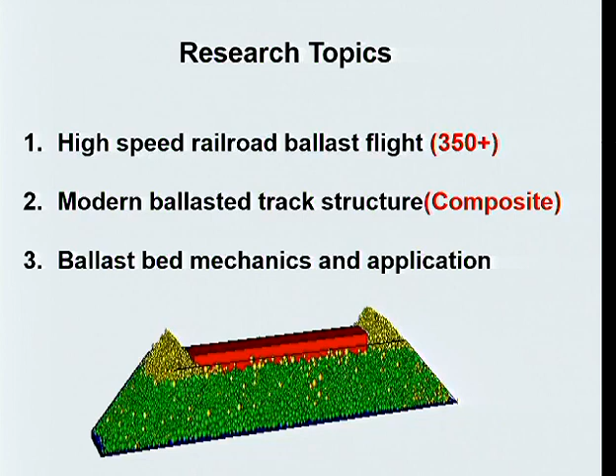Next, I'll show you a global perspective of China's high-speed railroad network. Up to now, we've covered 20,000 kilometers of high-speed railroad, about 12,000 miles, and we cover 2/3 of the world's high-speed railroad. More than 10 years ago, we had nothing. In just a few decades, we went from nothing to the number one position, far beyond the second position.

Not only the total mileage, but also coverage in places like the west, desert land, northwest, northeast, cold zones. And here we have high-speed rail running on this island. We even have the ambition and dream to connect with Taiwan. If political circumstances allow, we can construct an underground tunnel, no problem.

Another thing to share with you: for example, from Jinan to Qingdao, just within Shandong province, we have 3 railway lines: a freight one, a high-speed one at 250 km per hour, and now we are constructing the third one at 350 km per hour, just to connect the 2 cities within 1 province.

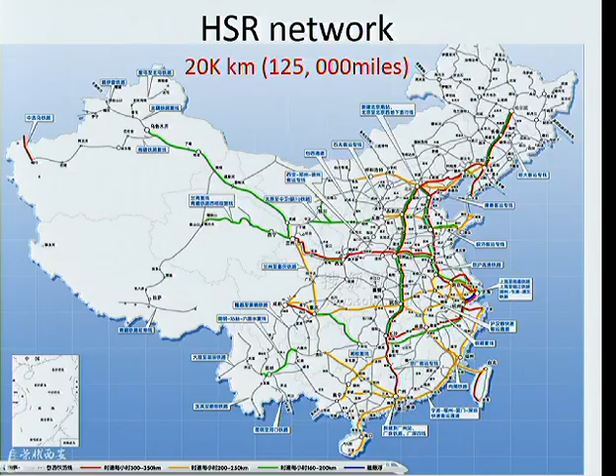90% of China's high-speed railroad uses slab track. It is a pity for me, not only because of the money, we invest too much money, but it also consumes too much cement, steel, and causes pollution. Too much. Somebody will maybe ask, why use slab track, why use ballast track? This is not the subject of today.

But I want to say that for each country, each product, the LCC, life cycle cost analysis, is different. And even for the same country, same product, 10 years ago, for example, from Beijing to Tianjin, the first high-speed railroad in China, we used this slab track. 10 years ago, each unit block, 6 meters long, cost about $4,000. But now, each block costs just $1,000. Because we have large scale, we can cut down the unit price. But some countries could not benefit from this technology or the market.

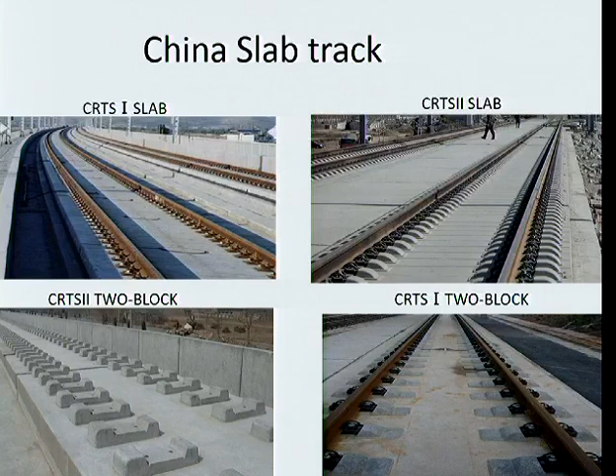When I share my lessons with my local students, I use the analogy method. I compare the slab track to men: strong, rigid, sometimes stubborn or stupid. And the ballast track is like a female: flexible, gentle, smart. Yes, this is it. And each coin has 2 sides. The ballast track's advantage is the disadvantage of slab track. Remember that, it is enough. Next one.

Just as David Lange said in the last seminar, micro cracks are the nature of concrete, born with it. We could not change it. And with time of service, ballastless slab track has problems: water, temperature, settlement. It's a pity that 10 years ago we didn't take this problem seriously. For example, crack control. We just designed and controlled the quality of strength, but somewhat omitted the cracks.

Huge problem. I could not present too many photos like this, but we have lots of such situations and conditions. It's very difficult to repair. We need a curing time within the window time of 3 hours. Impossible. And even when we use a chemical reaction method, like polyurethane, there is still a problem. Detection methods, evaluation, post-evaluation. Some small companies are working on it. We hope for help.

I also use the analogy with my local students that slab track is like the traditional Russian female. For the first 20 years, pretty excellent. After another 20 years of service time, just so-so. But for the final stage, the last 20 years, you don't want to see her at all. So this is what I share with my local students, because when you visit on site, it's excellent. But with time and aging, the aging is not like this, but like this, okay?

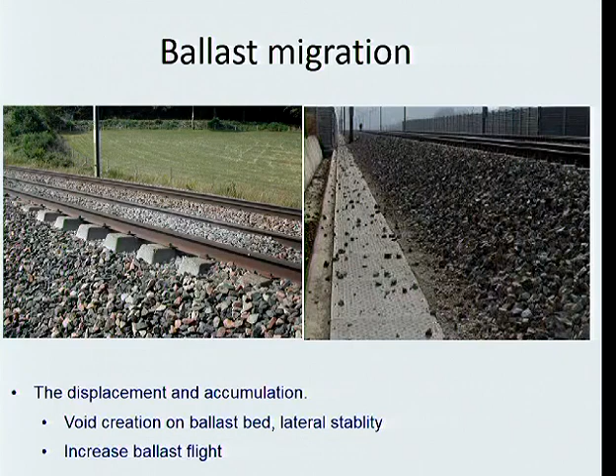So the initial stage of the ballast flight, this one, next one: dust flight. This happened in China more than 10 years ago, 2003, 2004, when we first imported the high-speed train to operate on our old tracks, we found dust everywhere. So at that time, we were worried. We worried a lot about ballast flight.

And there is also a joke to share with you: because we imported the high-speed train from Japan, the air conditioner input is underneath, which means we breathe the polluted, dirty things into the car. After that, we modified it, changed it. So this is our experience

for speed up. Maybe for some country, if you import the high-speed train and operate it on the existing, dirty lines, maybe you will have this kind of problem. Our solution: we add fresh ballast and undercutting, and after 3 months to 6.5 years of operation, no problem. This is the solution. It made a setback for us at that time.

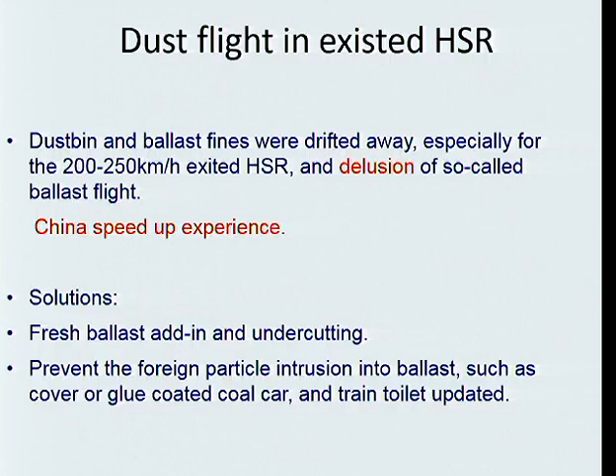Next one is ballast flight in snow zone. I also have research project funding from the company. Snow accumulates into ice, and when the high-speed train runs from the cold zone to the warmer zone, for example, Harbin to Dalian, there is a temperature variation. And when the high-speed train goes into and out of the station, the temperature changes. And when the train runs, there are dynamic effects, for example, transition zones, bridges.

So the ice melts and sometimes falls down. This is like a bomb, a high-speed bomb. It hits the ground and the ballast, or even the slab track, because the ice turns into small pieces and will cause damage to the train. This is our experience. So in winter, we have to reduce the speed. Summer speed, winter speed.

Japan, I should admit that Japan is the best of the best for this operation and management technology. They use de-icing operations for the train, snow removal machines, heating systems, high reliability systems, and the slow down method. This is the next one, Japan is best.

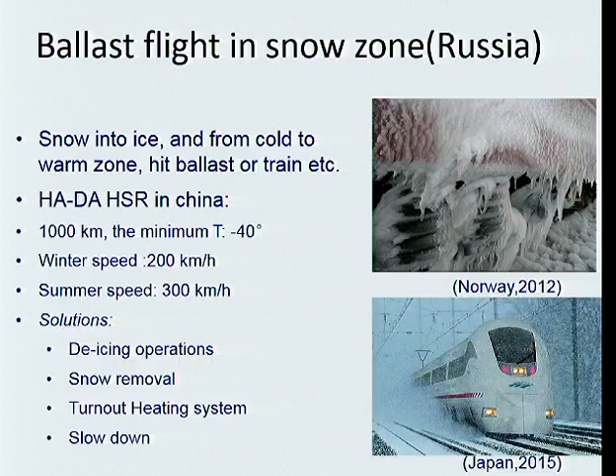And now we talk about the true ballast flight. True ballast flight usually occurs at speeds above 300 km per hour. Somebody said 250; in fact, that rarely happens. Usually above 300, the ballast particles acquire enough momentum and will pick up due to the aerodynamic and dynamic forces. Sometimes they hit the train and also the tracks, and damage even the surroundings.

By our inner report of the China high-speed train company, each year, each train needs several thousand US dollars to repair. Very little, but it needs some repair, which means ballast flight happens in China.

Ballast flight mechanism and risk: it is very difficult to find out what the reason is, because lots of interdisciplinary, cross-discipline factors influence each other, interlocking: the dynamic force, vibration, and the wind. Each factor influences the others. So it's very difficult to quantify exactly what the reason is, what the contribution is for the ballast flight.

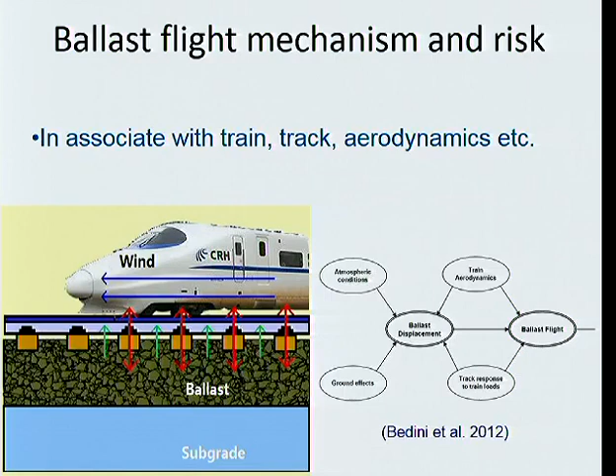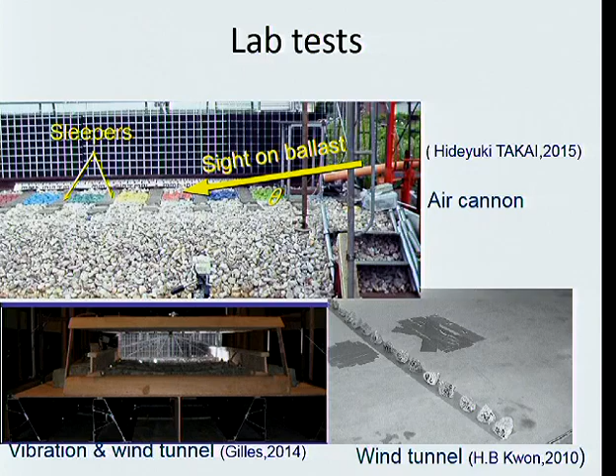Side test. This is Southampton, William Powrie, like Chris Baker. They did research on ballast vibration and ballast pickup tests. But the speed is very slow, just 270 km per hour, so no ballast pickup. And the Spanish, they are pioneer researchers for ballast flight.

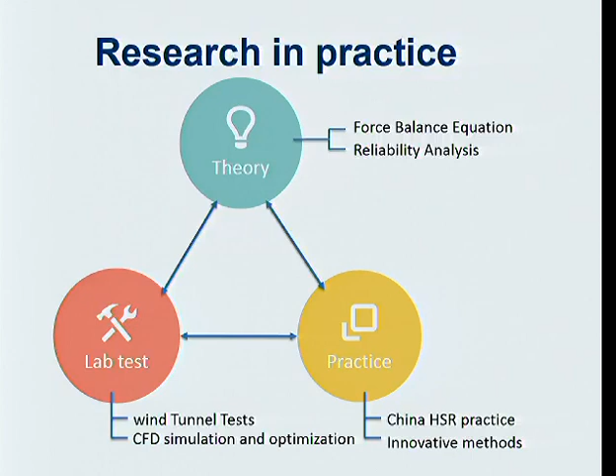And next one, my research in practice: theory, lab test, and practice. First one, just look at this one. Because this discussion is not the object today, anybody interested can find me for details. I want to use the simplest way to quantify the ballast flight.

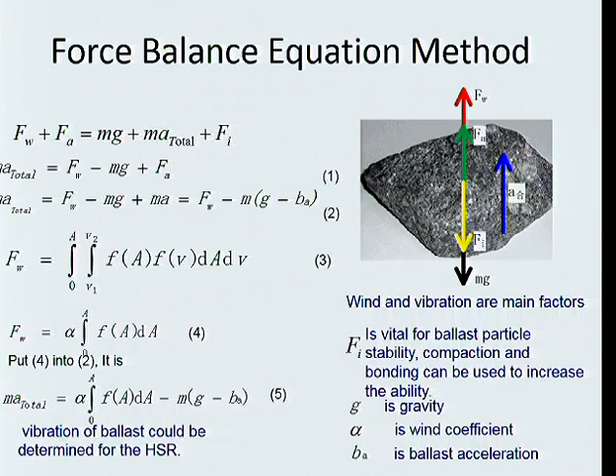So use the force equation: there is gravity, interlock, wind force, and vibration. I use this to set up the equilibrium. And by deduction and calculation, finally we can get this one. Very interesting, simple but interesting. For example, I found out there is this total vibration.

We can find out the ballast flight correlates with the mass and density. Bigger density, less occurrence of ballast pickup. And this ballast vibration, so we can find measures to reduce ballast-bed vibration. And also this one means the flight of the ballast chip. Very interesting. And also density, rho, which means density.

For example, volcanic production of ballast: the ballast particles are very strong, but the density is relatively very low. So this kind of ballast is easily picked up.

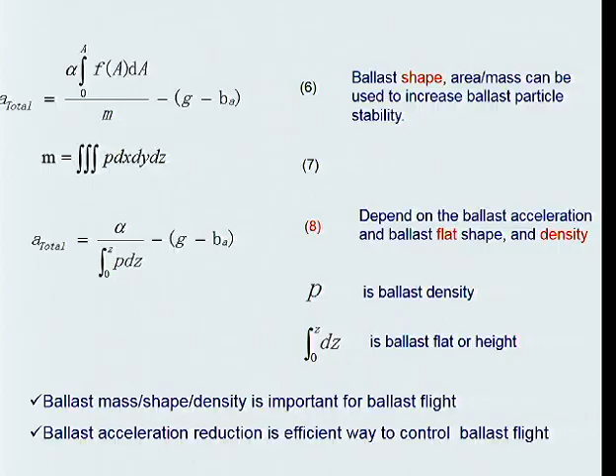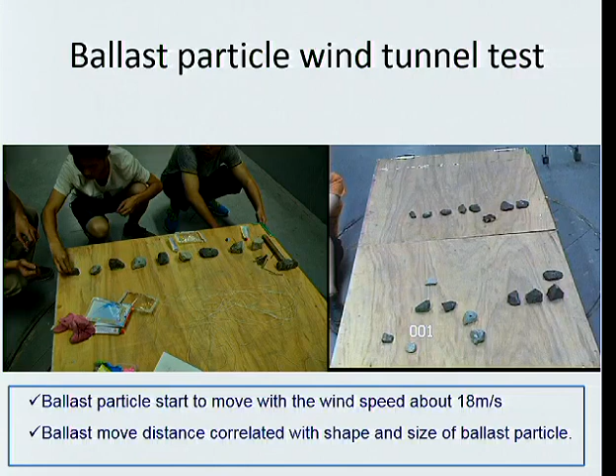Next one, our lab test. We use different speed, different shape, size, and ballast. And we also fix ballast particles and drill a hole, put the pitot tube tester in to test the surface pressure. We find out small particles easily start to move.

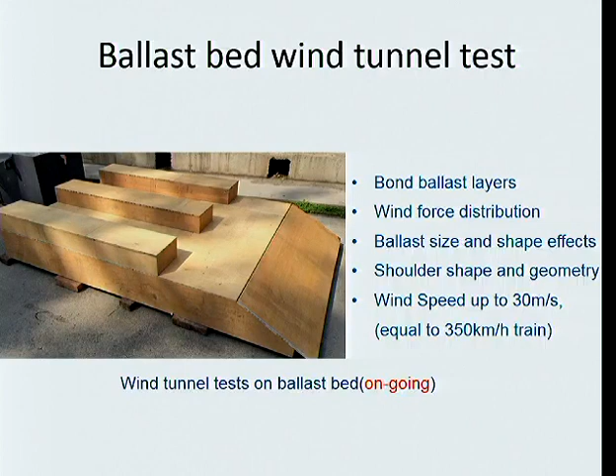And the next one, this is ongoing. I use wood to build a platform, and then we add stick, bonding ballast, and another layer. Different ballast shape, size, and I even want to use 3D printing: same shape, different size, and different density to test the possibility of ballast flight. This is a wind tunnel test. And we also can test the wind pressure distribution, together working with our safety.

Could you go back one slide? I'm curious, why does the shoulder ballast extend above the surface of the tie? Excellent. Okay, I will show you this one to answer it. If you're going to get there later, then we'll just wait. Okay, this one.

I have a paper using discrete element method research, field tests, and laboratory tests. Ballast single-sleeper resistance comes from three parts: bottom friction, shoulder ballast shearing, and also the sleeper side friction. Different research gives different results. For example, the Europeans say that 40% comes from underneath and 35% comes from the shoulder ballast. The shoulder ballast width and height are vital, because they provide the loads to keep the track.

And this is my discrete element method research evaluation of the contribution and evolution. For some cases, for example, uplift of the track, we lose contact at the bottom. For others, we reduce the shoulder width and shoulder height, and there are changes. Sometimes we have to reduce the crib ballast layer. So there is something like this.

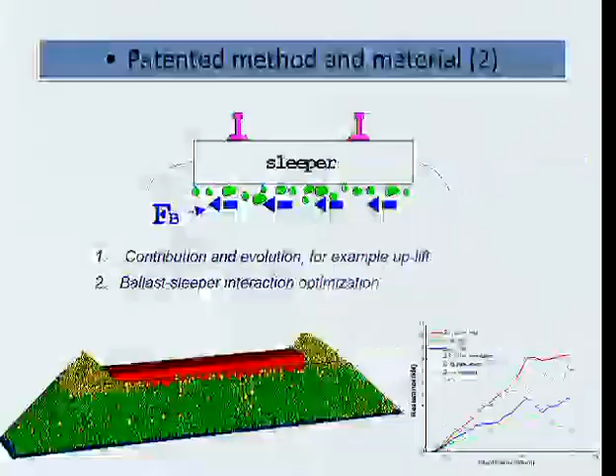Okay. For the ballasted high-speed track, the CWR stability is in some kind of conflict with ballast flight. As speed increases, we have to provide more lateral resistance. The most efficient way is to make the shoulder higher and bigger. But the bigger shoulder ballast results in much more occurrence of ballast flight. This is the conflict. We have to make a compromise.

The same thing here, this is another compromise, a conflict. As speed increases, we have to lower the crib ballast, but that results in a reduction of the resistance. Okay, I hope that answers your question. Okay, so we'll go next. Thank you.

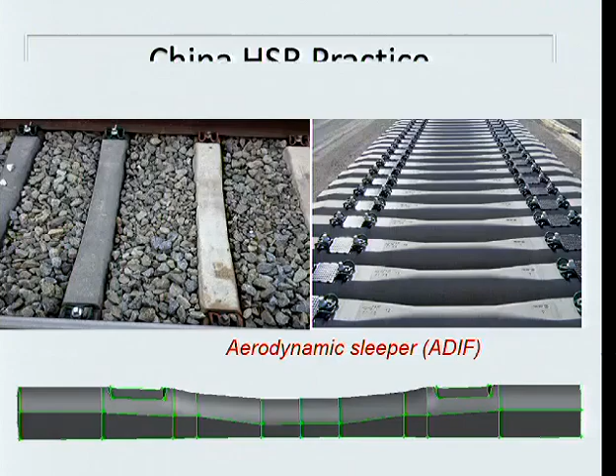Next one. Why is this efficient to reduce the possibility of ballast flight? Because it's very important: after construction or tamping maintenance, the ballast particles easily spread onto the top of the sleeper tie. Because the tie vibration is 10 times that of the ballast bed, by my equation, this is easily picked up. So each country has very strict rules for sweeping off the ballast.

If we use this shape, the ballast cannot easily rest there. So this is not only because of the aerodynamics, but also because of the geometry. The ballast cannot stay there naturally. So this is our simulation. We may use this one in the future for the Russian high-speed railroad design.

Next one, practice. This is translated from our high-speed railway design codes, which are in effect in China. First one, as I said, with speed increase, we should provide more resistance to avoid buckling, for the stability of the track. But the higher the shoulder, the more occurrence of ballast flight. So on the contrary, we have to not increase it but reduce it, resulting in a problem of future buckling.

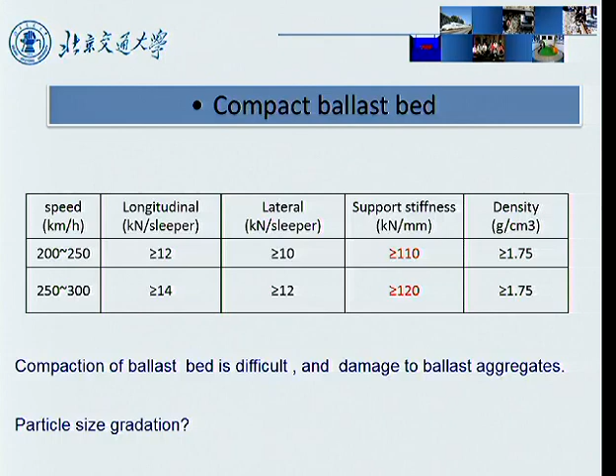You know, radioactive material management is a very big problem in China. In case it goes missing, for example, I could use these small things to kill you, to murder you. So the railway company doesn't want to use this technology. So we have to find, maybe in the future, an efficient solution for density and stiffness testing.

Next one, measures shall be taken. This is translated from our code. Our measures usually relate to polyurethane fixing. In other countries this method is used for reinforcement of curves or transition zones. But we use it not only in transition zones, but also to prevent ballast flight. And Japan uses this method. It might be no good because it needs labor-intensive maintenance.

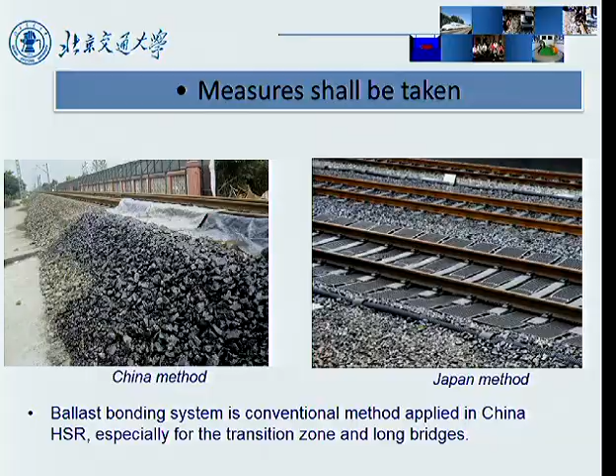Next one, a recent case for sharing. This is Hefu, okay? The Hefu line, operated last year. We call it the most beautiful line in China because it goes across the mountains and very famous sightseeing areas. There were once 2 kilometers of slab track with big settlement because it was once an old lake. This is in the south of China.

And we had to remove 2 kilometers of slab track. 80 workers worked 1 month to remove it. And we replaced it with ballast track. And the director asked me for solutions.

And I should note that 3 years ago, we had a 350 km/h test on a bridge, with 3 times validation. There was no ballast flight. We used a visual method, marking small particles with color and position, before and after, with a camera to test. No ballast flight at a speed of 350 km/h.

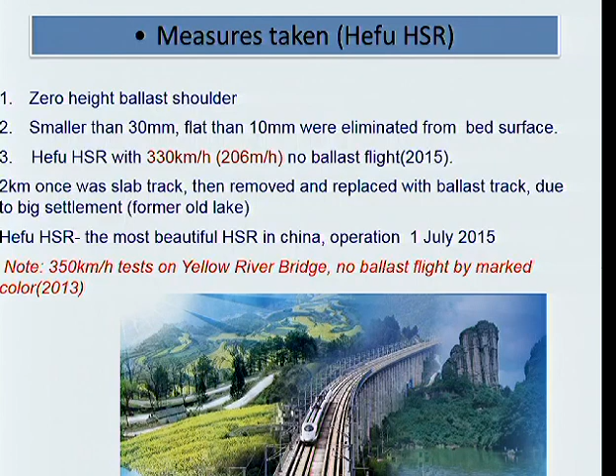This just proves that our high-speed trains are better than those of lots of other countries, with better aerodynamic design. I could not present the photos because the intellectual property belongs to the China Railway Company. All the other money comes from the China National Science Foundation. That's okay, that is for humanity, all the world. But the China Railway Company's intellectual property just belongs to them.

And next one, this is my innovation method. Okay, you can see. This is polyurethane, a soft one. There are millions of polyurethanes. This is relatively soft. We just cover the surface, a very shallow layer. For example, here, we can design and control the polyurethane strength and just fix ballast particles against dislocation and flight, but still allow tamping.

This technology will be mostly used on our first high-speed ballast track railway, from Beijing to Zhangjiakou, which is for the future Winter Olympic Games. The first operation speed is 350 km/h, but after less than 1 year, we changed it to 250 km/h.

If we use slab track, we could not change the inclination, but if we use ballast track, we could. Another reason why we use ballast track is that even with less than 100 miles, it crosses the earthquake zone. That's why we use ballast track. This is for the Winter Olympic Games, a political project. At all cost, just make sure no ballast flight.

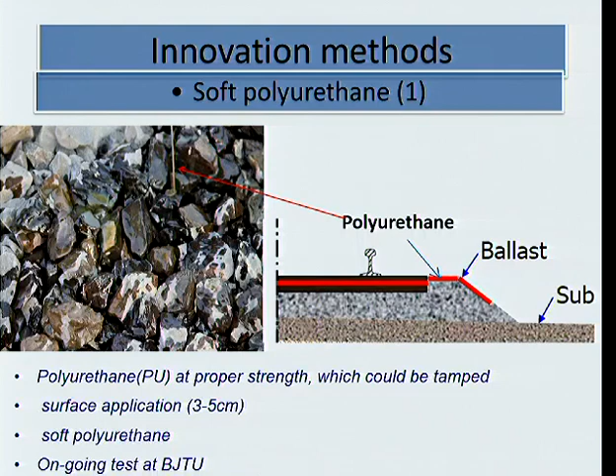Okay, next one. This is contribution and development evolution. Experience comes from several years ago when I did the ballast reinforcement by polyurethane. We found out that with total reinforcement by polyurethane, there was more than 10 times lateral resistance increase, and 12 or 14 times longitudinal resistance increase. This is far more than we needed.

So the idea occurred to me: why not use a specific zone, a specific position, for example, here. Along this is the tie. This is polyurethane. We still can use the tamping machine here, no problem tamping. And no problem for lifting the geometry of the ballast to tie. And we still could provide enough resistant force to keep the ballast track stability.

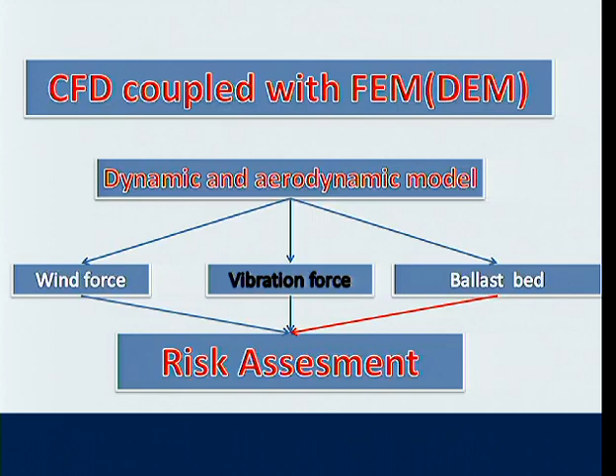We do have time for some questions. I guess I'll start with one then. What do you think are the most important factors affecting ballast flight? In my opinion, it should be vibration. When we did the ballast wind tunnel test, even when the wind speed was equivalent to 350 km per hour, the ballast particles just dislocated, not picked up. If the ballast has no initial momentum, normally the ballast will stay there.

Anybody else? What's your projected service life for the polyurethane treatment? Is this going to last 5 years, 10 years, forever? Excellent question. This is based on the protection purpose. For our first high-speed railroad, the local authority just wanted 1 year of service time. So it's no problem. The big issue for polyurethane application is maintenance. Normally, after 1 or 2 years, there should be tamping. So the service time of the polyurethane is no problem, but it depends on the tamping work.

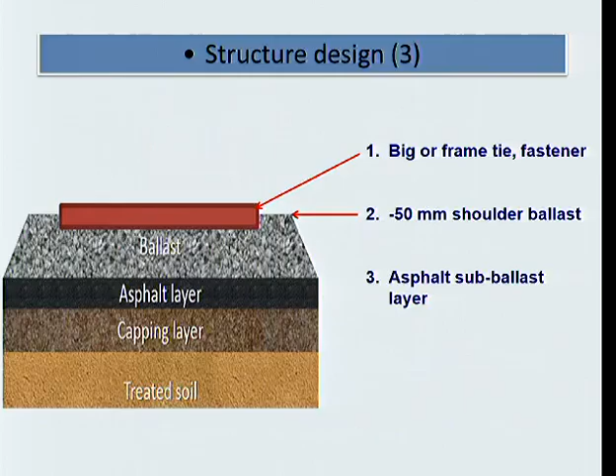I have two quick questions. One is, I think in one of your designs you showed a 50 millimeter, 5 centimeter decrease in the shoulder height, correct? You were suggesting that as one of the 50 millimeter, 5 centimeter options. Is that going to cause any lateral stability issues?

If without additional measures, for example the tie designed heavier or broader or the frame, if we reduce it there's no problem, but there will be a huge problem otherwise. So there must be research on how to, with the reduction of the lateral shoulder ballast, increase the sleeper resistance. Right, so that's our work, how to find other methods. Because I know you're trying to minimize ballast flight, but you're compromising maybe the stability, and that should probably be looked into.

The second question is, I know you talked about shared corridors for France, but actually I know in southern China with the heavy haul lines, now there's more talk about maybe increasing the axle loads in freight transportation, and maybe some of those lines may be seeing passenger traffic. Is there any plan to have shared corridors in southern China? Okay, I'll share with you.

In China, we have academicians, like from Jiaotong University, our chief engineer of CRC, his name is He Huawu. He got his academic title because of his contribution to the slab track. But somebody, maybe the vice chief engineer now, wants to become the next academician, so he should do something creative. One solution is to develop a heavy haul, faster, more than heavy haul track system. Somebody wants to suggest using slab track, but nobody dares to shoulder the responsibility.

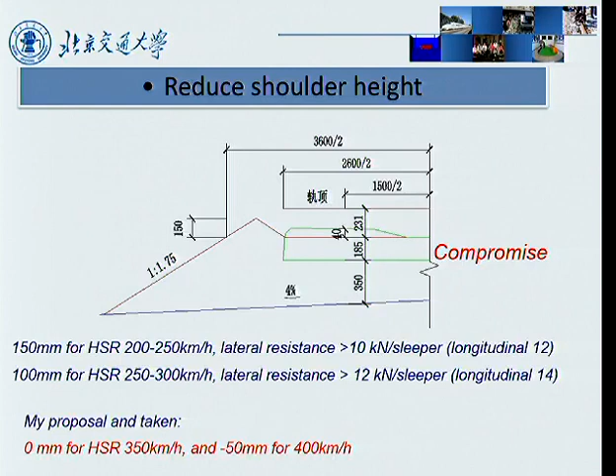You had a question? Jing, I have a question. Did you look at the different aerodynamic effects from different trains, to see how a different kind of train affects the aerodynamic contribution to the displacement of particles?

Something I'll share with you: I'm working on ballast track, but others, for example the ICE3, the same train working or running on French lines, there's ballast flight. But a French train, at the same speed, the same line, no ballast flight. So the train's streamline is the key factor to reduce the aerodynamics. But there is a limitation, this is almost perfect already.

ICE streamline aerodynamics is not so good because they are only working on slab track, not considering too much for the ballast track. The French, because it's totally ballast track, have to use all kinds of measures to protect the train from being hit by the ballast, like the underneath cover, the long nose, and even China has this influence.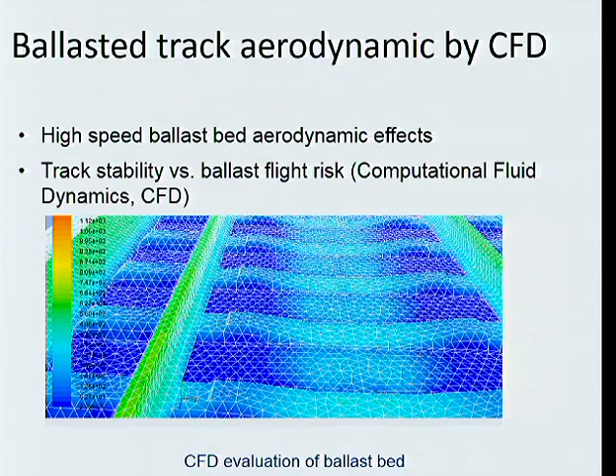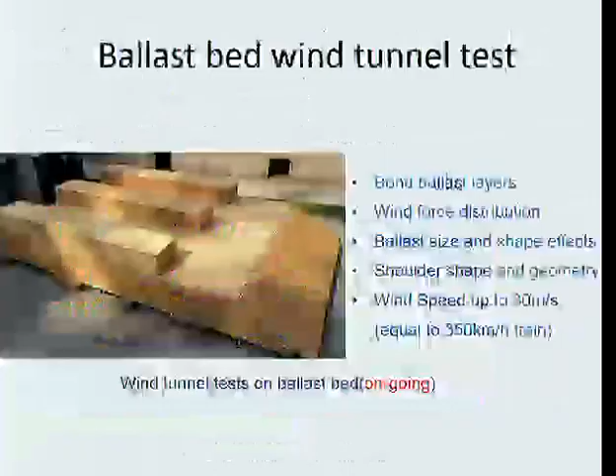During our slab construction or production, we actually have very strict control for the additive. Too much additive added results in problems in the future, because additive makes the concrete set quickly with good early quality, but after several years, post-age will result in problems. It's a pity that at the time we didn't realize this problem too much, we used unknown amounts and lost control of the additive material, controlling quality for faster early strength, because we need curing time, but it causes issues later.

So I have about 100 pages on slab track problems: acid water, across the entire high-speed train network in the most developed zones of China. Pollution and air cause acid water, with pH value around 4.0, almost like acid. The acid corrodes the concrete, reducing the precipitation layer and reaching into the steel bars. Once the steel bars are rotted, it's like cancer. It's a pity that 10 years ago we did not realize this problem seriously.